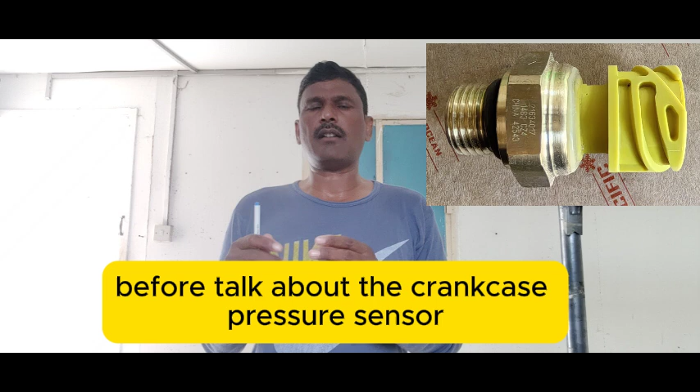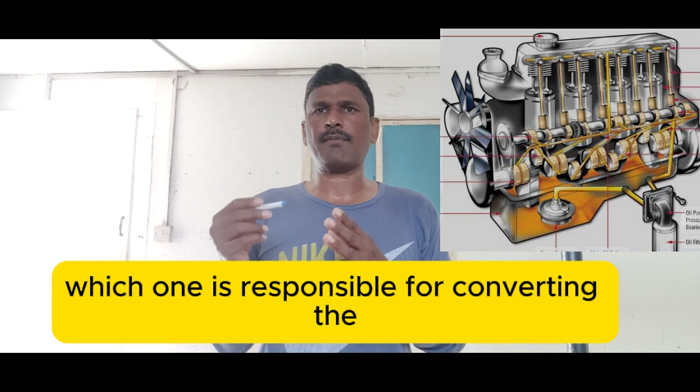Before talking about the crankcase pressure sensor, let me give you some know-how about what the crankcase is and how pressure builds inside it. The crankcase is an area inside the engine that contains the crankshaft, which is responsible for converting the linear motion of the piston into rotational motion.

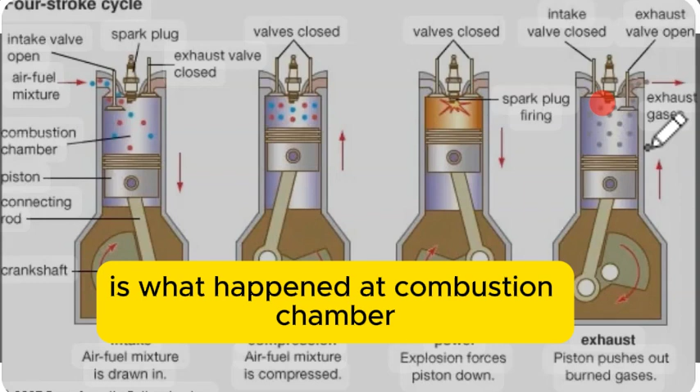So how does pressure build inside the crankcase? There are many reasons, but I will discuss two to three here. The first reason is that, as we know, combustion takes place inside the combustion chamber. Here's what happens in the combustion chamber: as you can see in the pictures, there are four strokes.

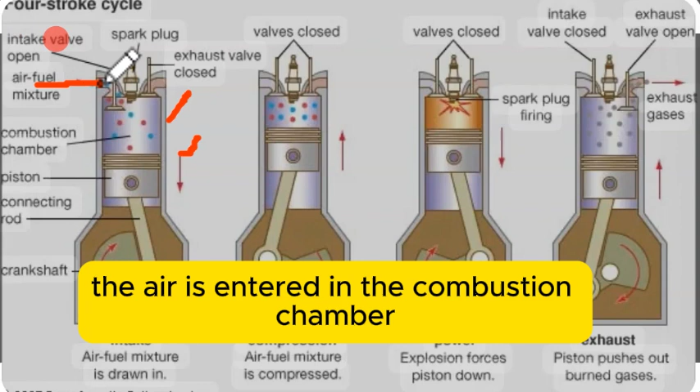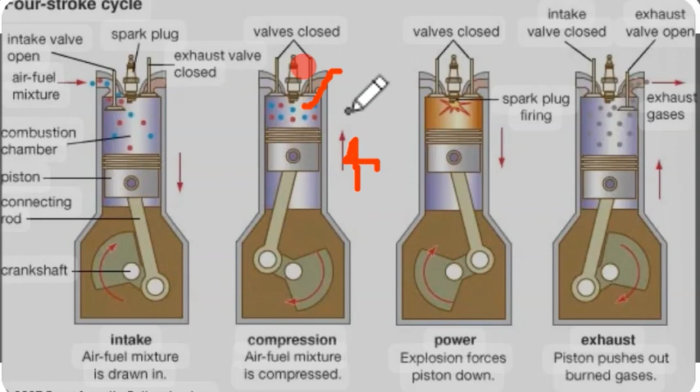In the first stroke, you can see the piston moving downside. As the piston comes down, air enters the combustion chamber through the intake valve. In the second stroke, the piston goes upside and the air that entered the combustion chamber is compressed. Due to compression, this air becomes very hot.

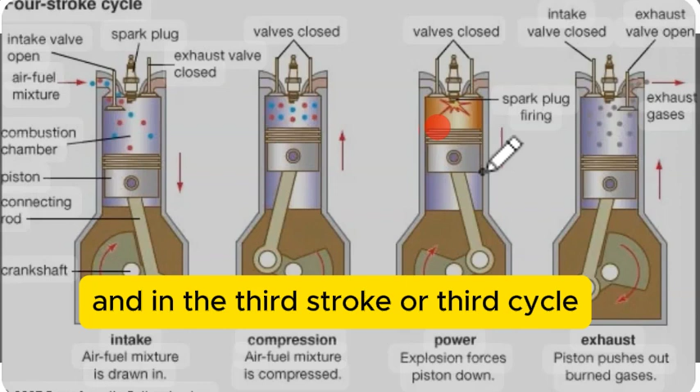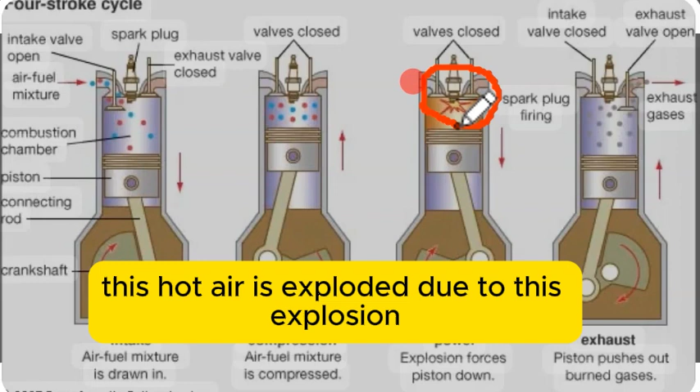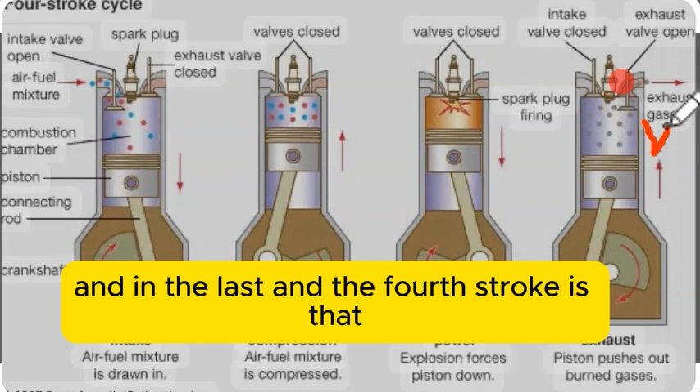In the third stroke, this hot air is exploded. Due to this explosion, the piston goes down again, as you can see the direction of the piston coming downside. In the last, fourth stroke, the exploded gases are exhausted out through the exhaust valve.

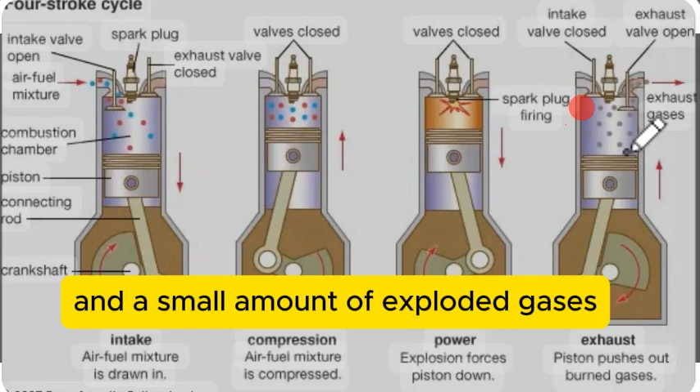A small amount of exploded gases enters the crankcase through the oil seal rings, producing gases. Some gases from the combustion chamber escape past the piston rings and enter the crankcase. This mixture is called blow-by, and it increases the pressure inside the crankcase.

The second reason is that engine oil can also vaporize due to high temperature, which also increases the pressure inside the crankcase. The third reason is that worn off piston rings or cylinder walls increase the amount of blow-by, raising the pressure inside the crankcase.

The last, fourth reason is that modern engines use the PCV system to manage crankcase pressure. PCV means positive crankcase ventilation system. The PCV system helps ventilate and circulate these gases to the intake manifold, reducing the pressure. Due to some reasons, this system can malfunction or become clogged, which increases the pressure inside the crankcase.